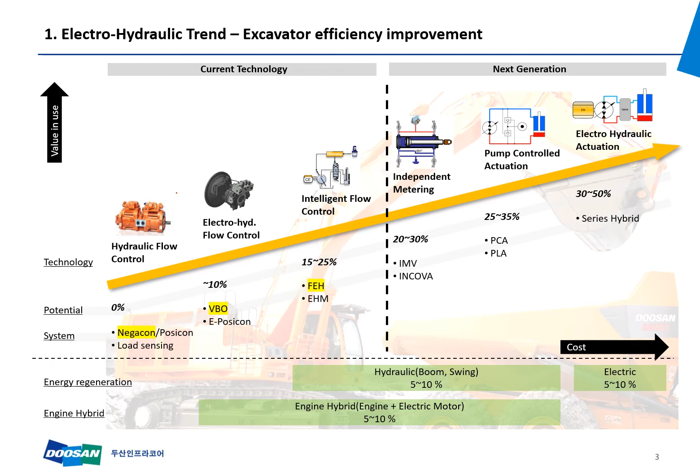So before introducing VBO and FEH, I would like to explain Negacon, the current hydraulic system of the Doosan excavator. One of the many ways to move the cylinder is to control it using Negacon. The pump first produces the total flow rate into each cylinder, and the valve distributes the flow rate per pump.

Sometimes people say that the valve determines the speed at which the cylinder moves, but that's not exactly true. Some of it is correct, but the amount of discharge does not change if it is a single valve line. This means that if there is more than one valve, the flow rate will be determined by dividing the flow rate. Depending on the pump flow rate and valve stroke, there are Negacon, Posicon, load sensing, and etc.

First, if you look at the Negacon system, if you move the joystick, it pushes only the spool, as you can see. Pushing the spool affects the flow rate of the center bypass, as you can see. By default, this bypass line pressure is generated from the foot relief valve orifice. As a result, valves move physically to determine the pump flow rate. It is determined by a correlation between pump and Negacon pressure in the regulator.

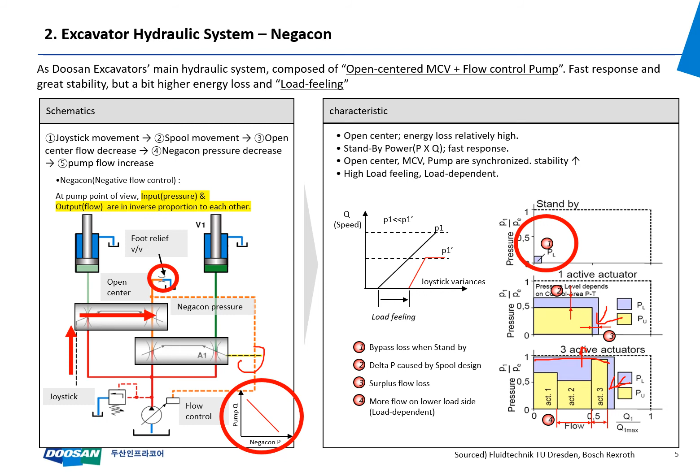Negacon's MCV and pump are synchronized well. The actual valve and pump must be synchronized well for flow. The flow rate must be discharged after the valve has been opened, and flow rate must be reduced after the valve is closed. Otherwise, peak pressure may be generated or problems occur on the machine. Negacon has little chance of unbalance because these parts are mechanically related to each other.

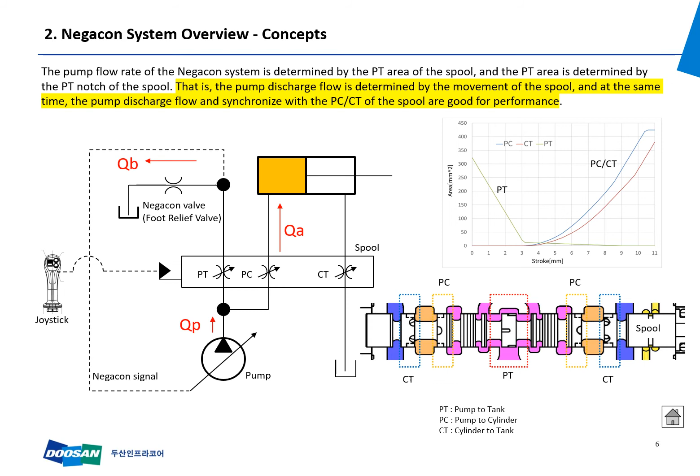The simulation shows the following. First, pull the joystick. Second, the spool is pushed by the pilot line. And then the pressure drops as the flow rate to the tank is blocked, and the pump angle is increased to increase the flow rate.

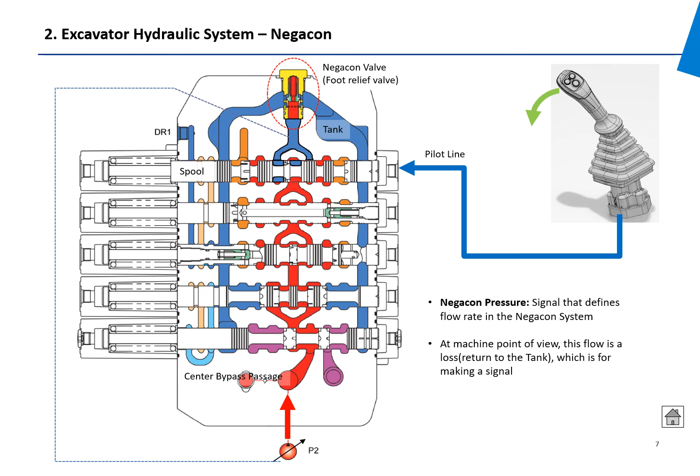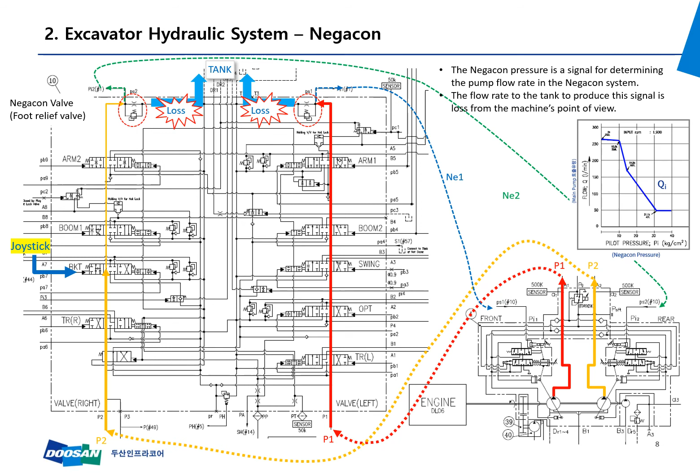This is a circuit diagram of the Negacon system. You can see the Negacon signal comes from the regulator and determines the pump flow rate. This Negacon signal is a loss from the machine's point of view. If you look at this diagram,

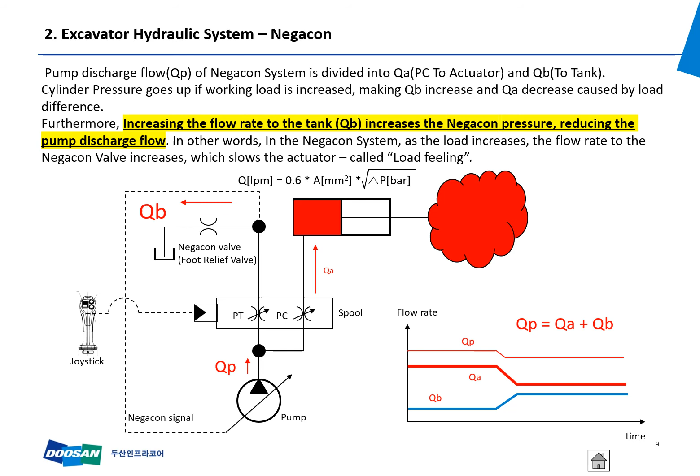under load during operation, if the cylinder pressure rises, the delta P decreases. So QA flow rate will decrease. This also increases the QB flowing into the tank. QB increases the pressure of the Negacon, which reduces the pump flow rate. As a result, QP is reduced. And when there are multi-actuators, flow rate will be distributed by load on each cylinder and area of the PC notch in the same way.

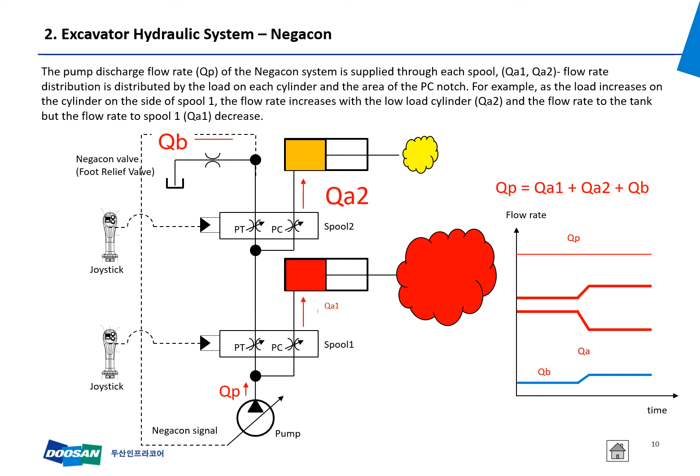And now we are going to see VBO, the Electro-Hydraulic System controlling way. First, we need to understand what electrification is. Electrification means conversion of a machine or system to use electric power. This could be changing power to reduce emissions, changing the actuator's drive, such as cylinders, or electrification of control signals. There is a part called control by wire, which means it can be controlled by electrical signals. That is the concept of the current VBO system.

The hardware of MCV and pump is the same, but there is now a difference in the parts controlled by electrical signals. It is not that the mechanism has changed, but the control signal has changed.

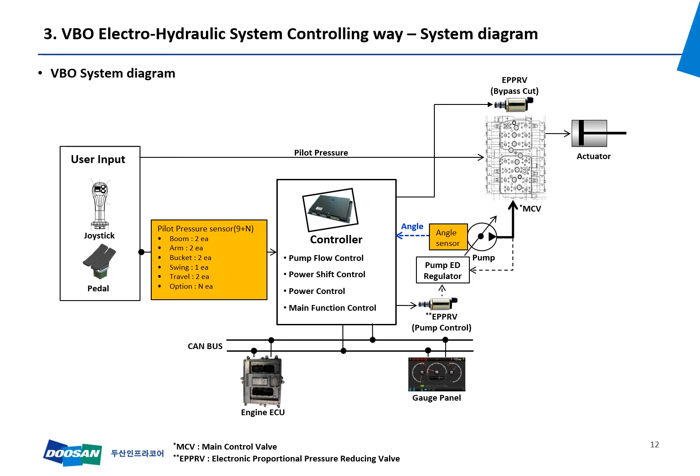So this will be the last page of the first presentation. The second presentation will be about VBO and FEH system in more detail.